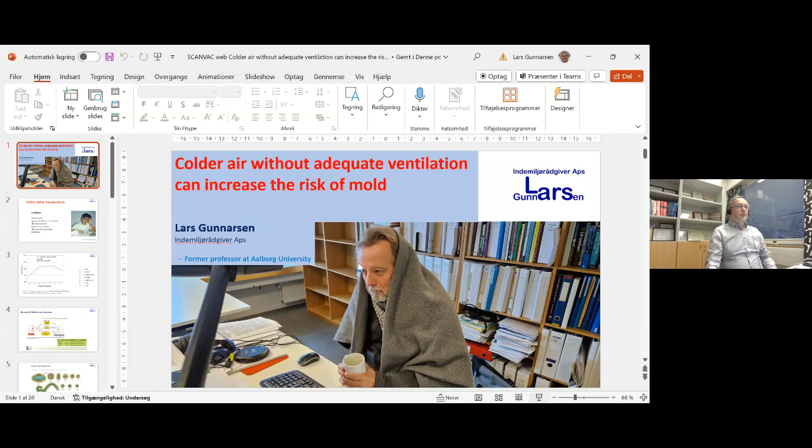This topic rose up after discussion with Nordic colleagues, that it's important to share experience in energy saving when we have challenges for energy, and especially energy power, in some countries. We have huge demand to save energy in wintertime, and that may cause challenges for indoor climate conditions, and maybe also challenges to keep the needed energy targets and cost levels we are talking about. So we are now focusing on this topic and collecting key talks from different Nordic countries, and what kind of experience we have here.

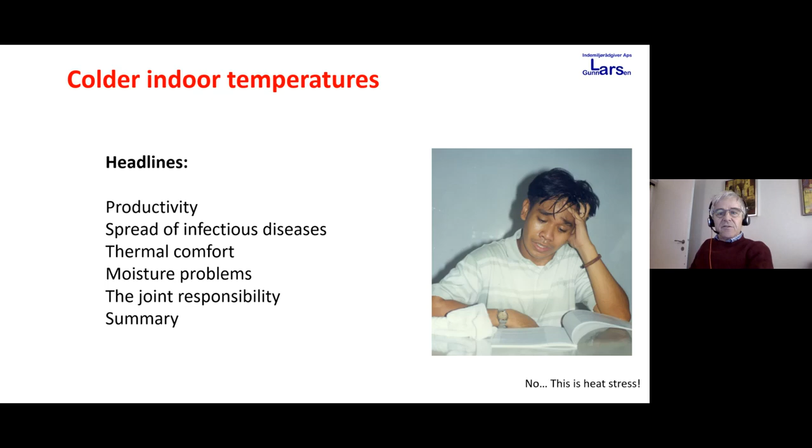So, well-known old findings: when we have poor thermal sensations, then our productivity drops. And of course this is very serious when we think about school environments, that learning is not so efficient. And I'm sure our employers are also quite focused on this.

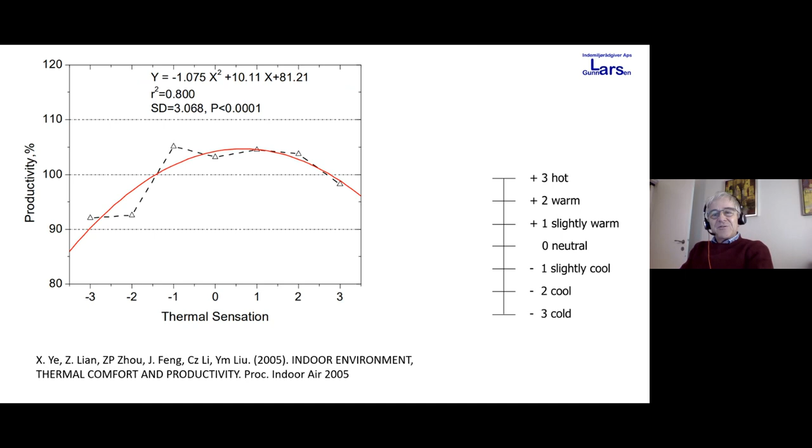It's quite important to know that when we earn a salary and we are not in thermal comfort, then we may not be worth our salary. It's a joint obligation, of course, between employer and employee, that we should not suffer from feeling cold or feeling warm. And it's also quite important to recognize that thermal sensation is a response of temperature, clothing and activity. So it's not impossible to feel comfortable even in quite cold environments.

Spread of infectious diseases: here we have something with the size of the droplets that are spreading these. If we are in warm and dry environments, the droplets we exhale and cough out will very soon become little particles. In more humid environments, the evaporation of water around the particles will be slow, and some will keep being droplets that can traject directly to our surrounding occupants or drop to floors and desks.

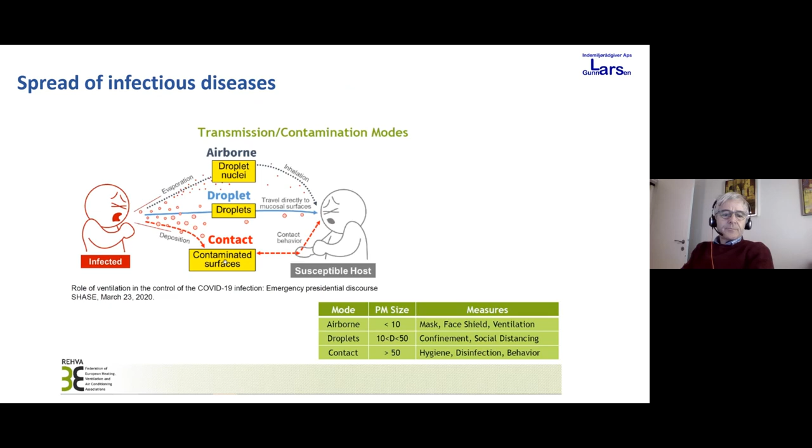It's important in this aspect to recognize that the viruses that might be infectious are so small that they can stay airborne for a long time. When we are in the virus range, say 0.001 or 0.01, then displacement due to diffusion is important. And when we are in the droplet range, then displacement due to sedimentation is the important transport mode for these particles.

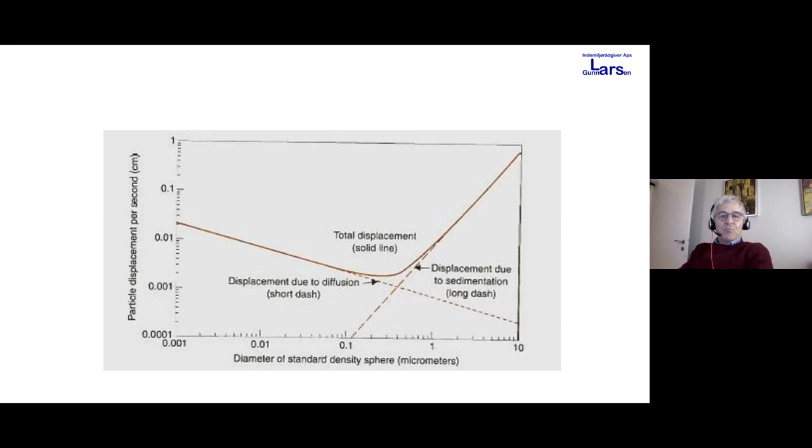Another old finding, of course, is that when you are exposed to something that makes you feel cold, then you are far more vulnerable to infections. So I find this a very strong experiment.

For 20 minutes, half the test persons were asked to take off shoes and socks and sit with their feet in a bucket with cold water at 10 degrees Celsius. The other half, the control group, sat with their shoes and socks off but their feet in empty buckets, also for 20 minutes. Then 4 to 5 days later, the difference between subjects reporting to have a common cold was significant and quite marked. 13 out of the 90 who had been sitting there with cold feet reported having a common cold, and only 5 among the control group.

When it comes to this impact, during last year the energy crisis and the rise of gas prices for domestic heating was very high. Then also in offices, public offices or governmental offices, we were recommended to have only 19 degrees.

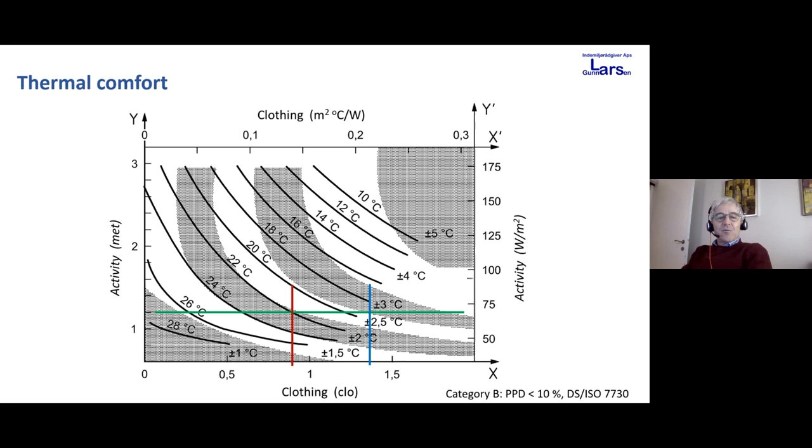This green line is trying to intercept 1.2 met, the traditional way of thinking about the activity we have when we do office work, and the red line is intercepting 22 degrees, my approximation of what I used to have in my office before that crisis last winter. Something like 0.9 clo value and something like 1.4 clo value to be in comfort.

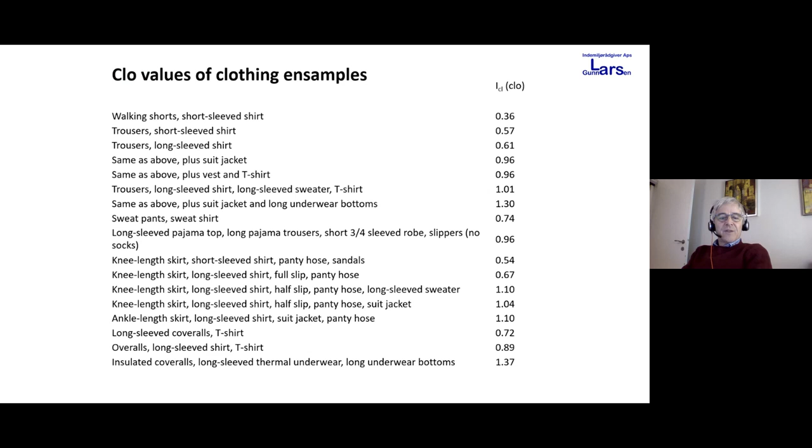When we look at these clo values, the closest I can get to the high is trousers, long sleeve shirts, long sleeve sweater, t-shirt, suit jacket, and long underwear bottoms. So that's a lot of clothes to have on.

This is what I used to go to work with, and last winter I used a lot more clothing, and of course the unusual thing for me was these long underwears under my trousers.

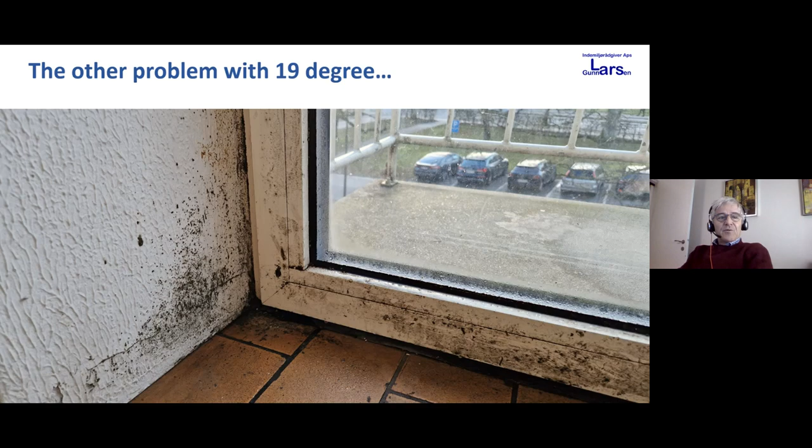The other problem with 19 degrees, which is of course the primary focus of this presentation, is that the colder air gets, the less actual water the air can contain. It's obvious, I guess, to most of us that the diffusion of water molecules is not in relation to relative humidity, but to absolute water content.

So if we look at the absolute water content at something I have estimated to be an average cold day in Denmark - I'm sure in other Nordic countries an average cold day will be a lot colder than 10 degrees, but my approximation here is made for 10 degrees, and we all have days with 10 degrees outside - and then I have the 19 degrees and the 22 degrees.

What I'm thinking here as a risk of mold is 70% relative humidity, and we have 11.5 grams per kilo in the warm environment, 9.5 at 19 degrees, and 7.5 grams per kilo in the outside air on a rainy day at 10 degrees Celsius.

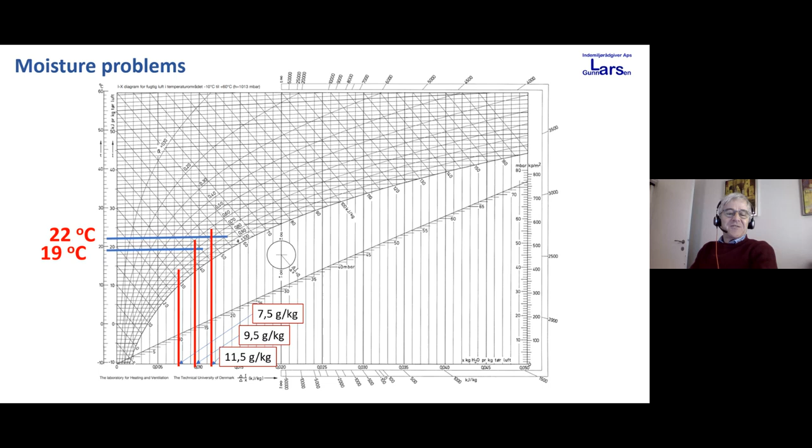So here come the primitive calculations I've done: how much more water can indoor air contain at 22 degrees than at 19 degrees, at the same relative humidity of 70%? It doesn't seem really scary, 21%.

But still remarkable. Where it really becomes serious, and when we can recognize that lowering indoor air temperature from what we were used to down to 19 degrees matters, is the answer to how much higher an air change rate is required at 19 degrees than at 22 degrees to have the same assurance of not exceeding 70%. My simple calculations say it's a factor of 2.

This was something many Danes failed to realize when there was this brief period of very high energy prices last winter, and many of us experienced mold growth during that winter. To communicate it simply: when you have 19 degrees indoors, you need to air out your office or home twice as much as you used to.

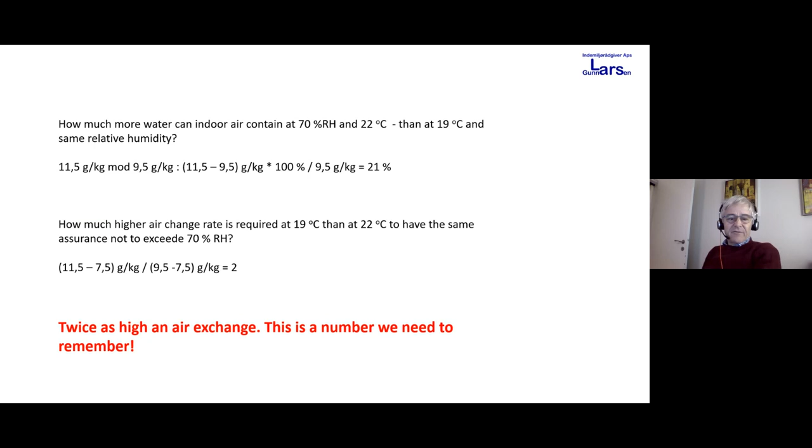My primitive calculations before can also be supported by BSIM, a computer program from my old employer. So if we think about a small apartment, not very unusual, 6 times 8 meters, 48 square meters - it is small - with a ceiling height of 2.4 meters.

I guess you can read the rest: 2 persons living there with normal moisture production, nice windows exposed to sunshine from the south, and these people air out with a lot of air changes when temperatures exceed 25 degrees. It's a modern house with a nice U value of 0.3 watts per square meter Kelvin.

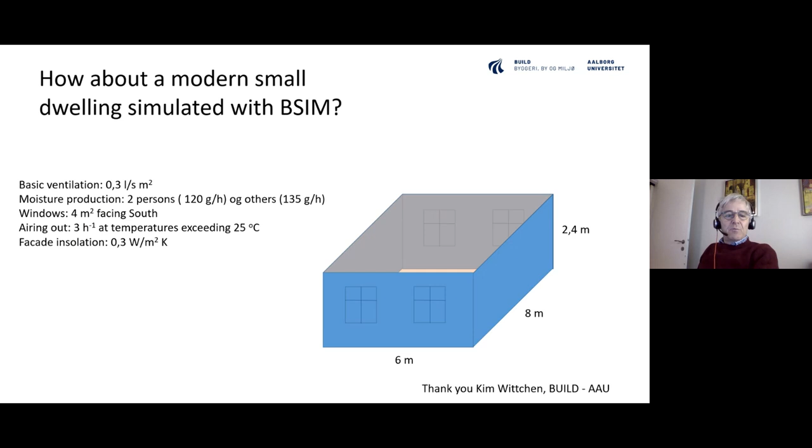And of course, this is an apartment we are envisioning with no cold surfaces anywhere. So if we have some cold surfaces around the windows or somewhere else, then those places could have mold growth earlier on. So this is something I see as a big problem if we go to 19 degrees normally, and if we don't have a lot of excess airing out in the cold periods.

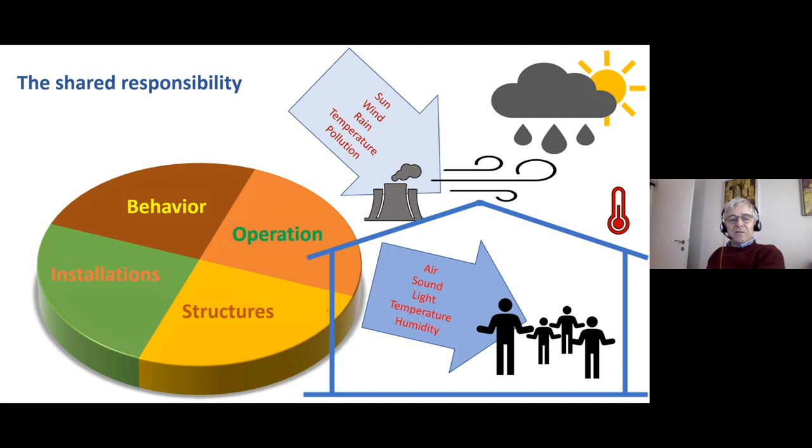So this is the end. My summary: we perform and learn less when we are not in thermal comfort. So take on clothes if you are cold.

And of course, my experience with these 19 degrees, as when we are a little bit below 19, then we also need gloves and maybe a hat on. So I think I'm paid by my employer to press keyboards and things like that, and I cannot work with gloves. So 19 is somewhat a limit for what normal clothing can do during office work.

Spread of infection, I think it's more or less established that we infect each other more in dry air. And it's definitely very established that we are more susceptible to infection when we are cold. So one thing is the effect of dry air on these droplets, and the other thing is our body's reaction to being cold, making our mucous membranes more vulnerable.

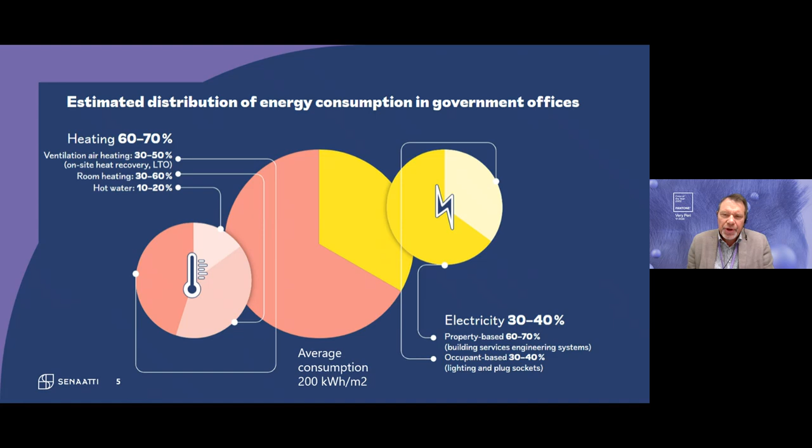If we look at normal energy consumption in government offices in Finland, average consumption is about 200 kilowatt hours per square meter, and most of it is heating, and also ventilation, normally the biggest part. Then we have the electricity side, where property-based use is most of it, and occupant-based is about 30%, meaning lighting and plug socket use.

We started this energy saving program more than a year ago, and we set our goals: first, to reduce energy consumption by 50 to 75 gigawatt hours, which is about 5% for one year of use. We calculated it's possible to save as much as 10 million euros in savings, and we also started a program for more demand side management and the possibility to reduce electricity consumption or shift it to another time.

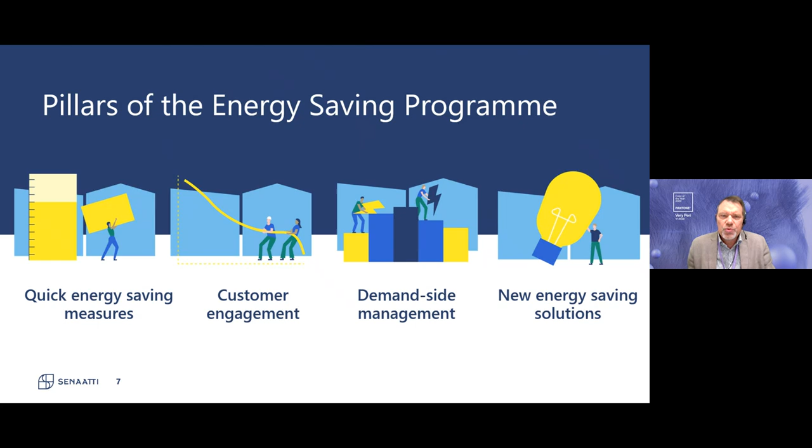The results: one year into this program, energy savings are about 73 gigawatt hours, almost 5% of normal year consumption. That translates to cost savings of about 6 million euros, not 10, because the energy price has not been as high as we expected. These measures have been completed in more than 1,000 buildings.

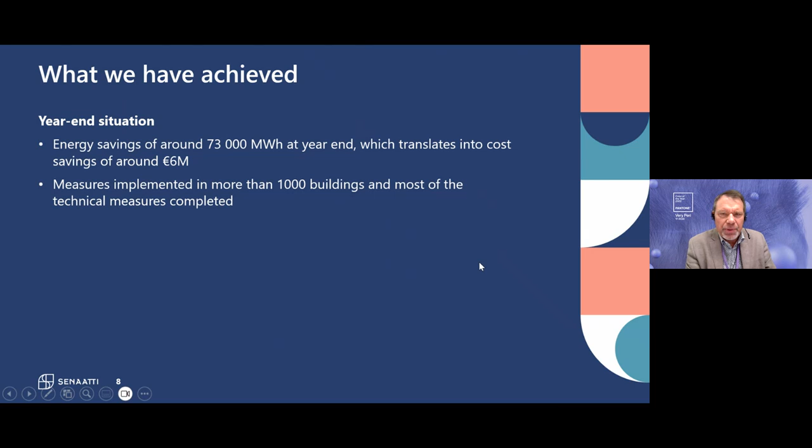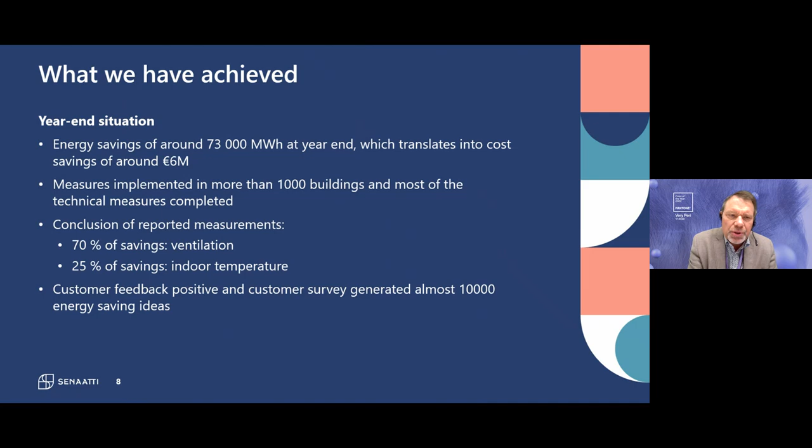We've also drawn conclusions from all the reported measurements - not a big surprise - that 70% of savings are connected to ventilation systems and 25% to indoor temperature. But most important, customer feedback has been positive, and one sign of that is the customer survey generated almost 10,000 energy saving ideas from the customer side. They are very interested in this program.

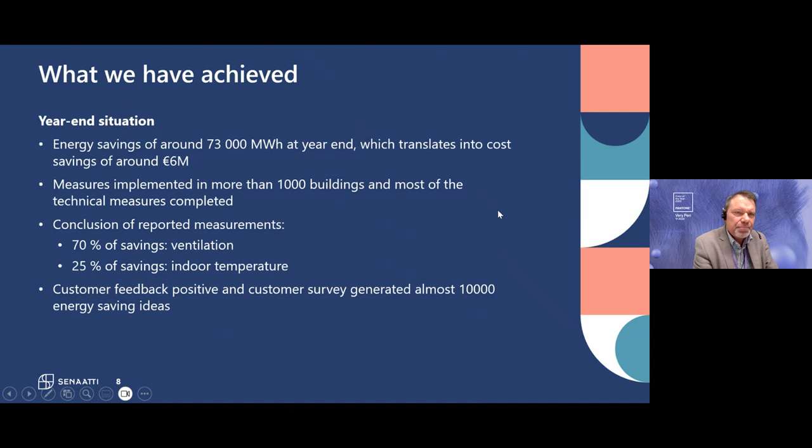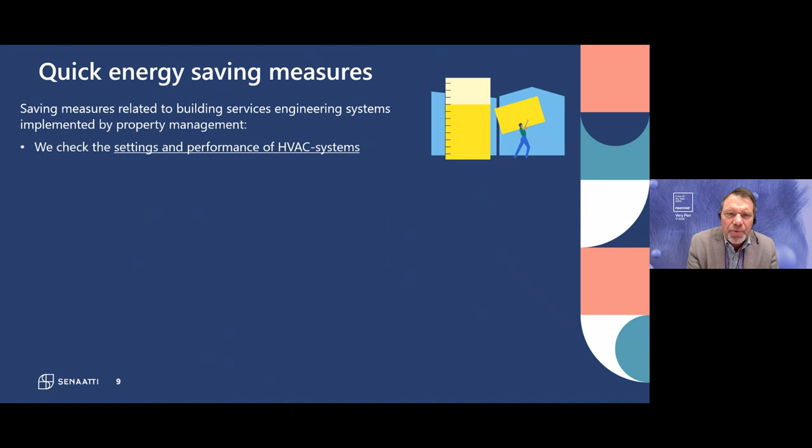These quick energy saving measures include, once again, checking the settings and performance of HVAC systems. We decided to lower the temperature in offices to the level of 20.5 degrees Celsius, not under that.

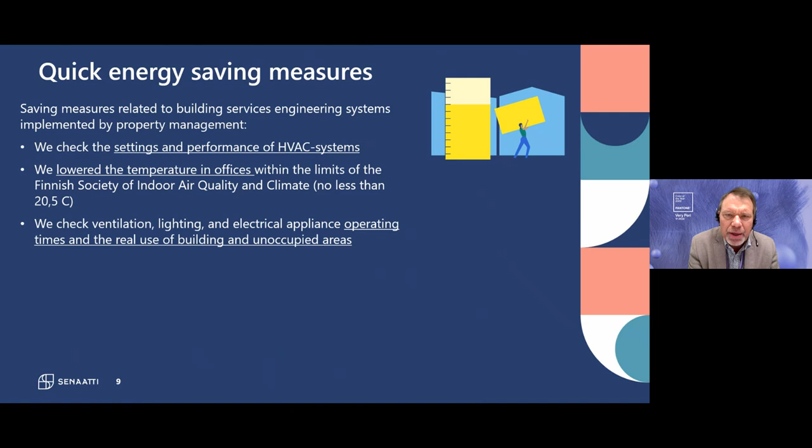And of course, the operating times of all systems, but in this case, also in Finland, connecting it to the real use of the building. We have a lot of unoccupied areas, and in those areas it was possible to do more savings.

Then we started using the air conditioning units at a lower stage during very cold outside temperatures. This is not only energy saving, but a very good way to cut the power peak of heating and electricity as well.

And of course, we make sure that this doesn't compromise safety or indoor air quality. That means that if there are cases with information about issues, then we go back to the normal way of using the systems.

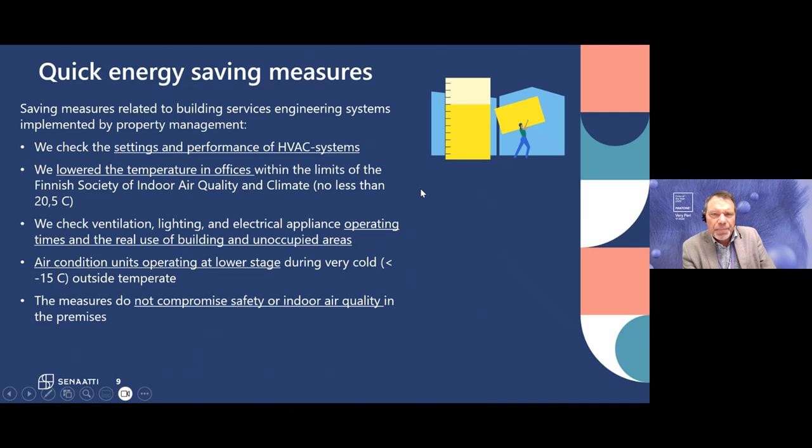Customer engagement was, of course, very important to make sure everybody knows what we are doing, why we are doing it, and when we are doing it. We also collected customers' own energy saving ideas - as I said, we got almost 10,000.

We made a satisfaction survey, and it was also possible to send feedback from our open website. We have already in many buildings the possibility to send feedback from those buildings with QR codes, and it goes straight to the property management system.

But what was most important is that during this year there has not been a big difference in customers' feedback regarding indoor climate.

Internal communication also took care that there were many people and many teams involved with this program. We got info to the property managers, and we collected all this information on our homepage on the intranet.

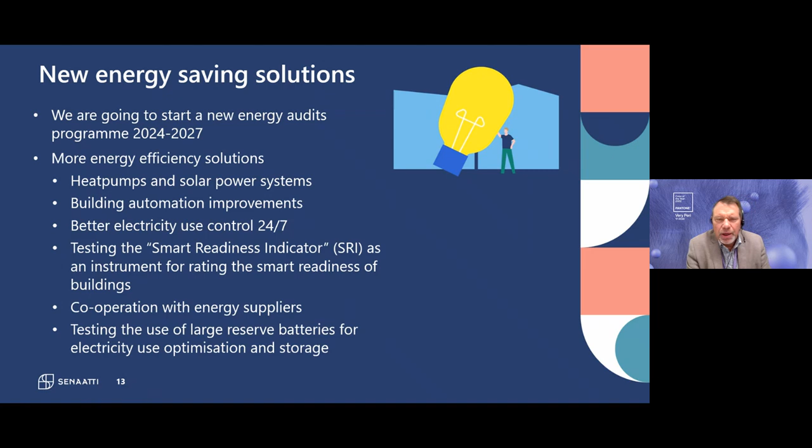Most of our big buildings are in the district heating area, but we have to have more cooperation also with energy suppliers. Next year we are also testing the use of large reserve batteries for electricity use optimization and for storage.

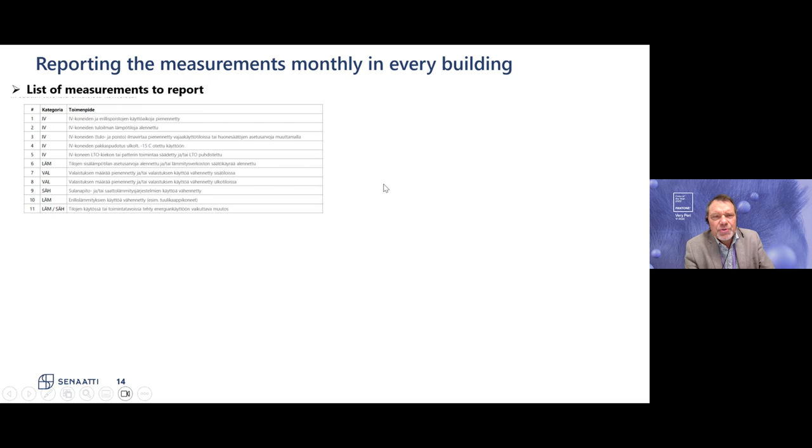When we started this program, I wanted there to be a reporting system from the beginning, so we could have information about the measurements monthly and in every building. So in our system, we made this kind of list of measurements. There are ventilation, heating, lighting, and so on, this type of measurements to report, then monthly reporting.

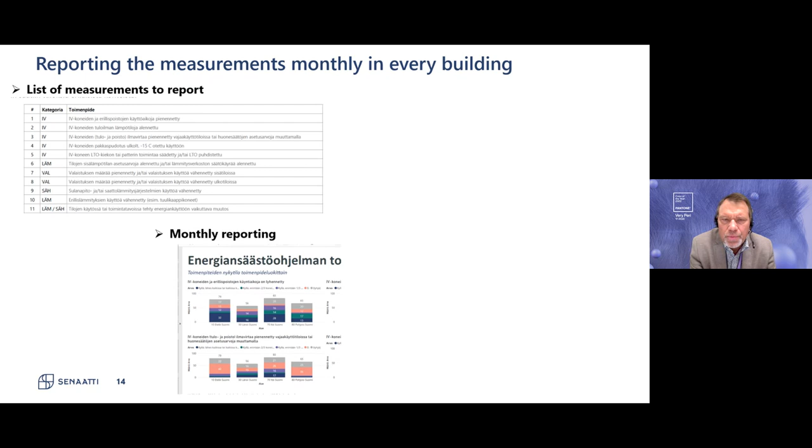The colors in this picture show information about whether this measurement is for a large part or part of the building. So in this monthly reporting, we could calculate and estimate the savings achieved, and we started this from the beginning, so we were all the time aware how the savings were going. After 2 months we got the savings reporting, and it was good enough, so we were having the kind of savings that we expected.

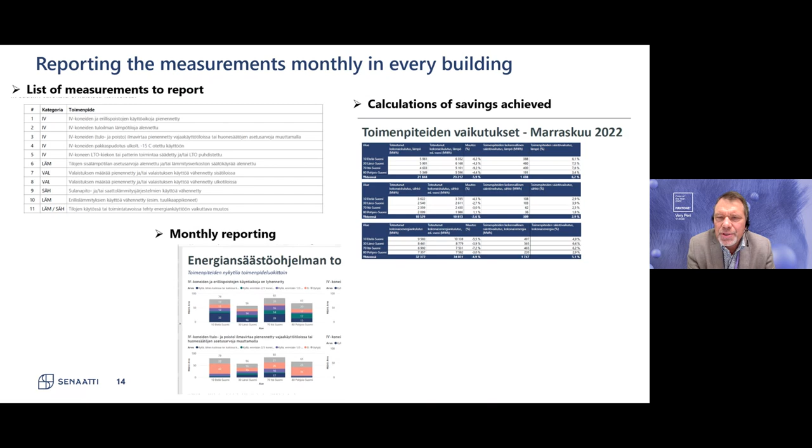Okay, what did we learn? For me, first of all, I was in a way quite surprised that there were still many ways to make the energy use more efficient. These 5% savings are much more than we normally achieve. We are at that kind of 1 to 2% level over the past few years.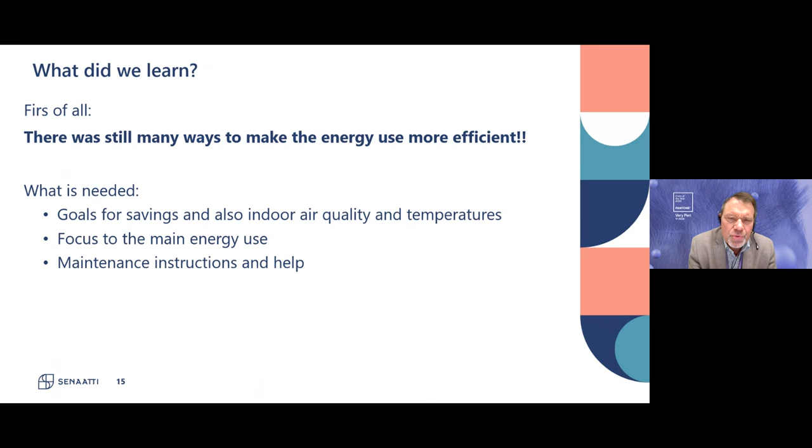Looking at this program, we can say we need, of course, goals for savings, but also goals for indoor air quality and temperatures. Then we have to focus on the main energy use, and of course the maintenance instructions, how we do it, and also online help with these instructions. Information, very much information, and cooperation with customers. And also very important from the beginning is to have continuing reporting of actions and savings, so we can make the right moves if needed for this program.

And of course, very much work at the buildings. This is not an easy way to do it, but in this way we can succeed.

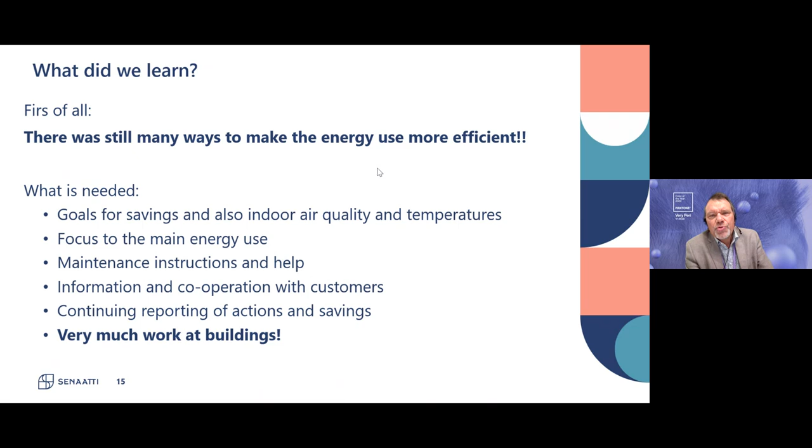We are going to continue this program. We are not going back to what was before it, but of course we are not expecting so much savings anymore. Next year we are expecting about 1 to 2% savings, and of course new, more energy efficient systems and solutions are coming, and they will help us also with these energy audit programs.

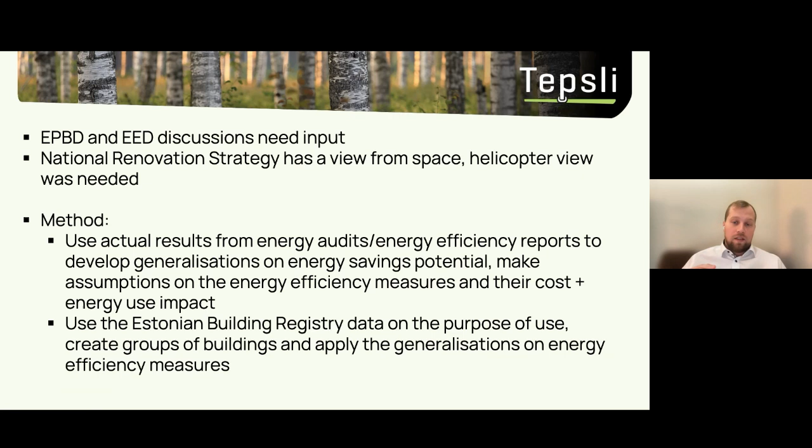So if you look at it, imagine two sheets of paper. On one sheet, you have the data on the purpose of use of buildings from the Estonian building registry, and some data on those buildings. The other sheet is how you can make different building segments more energy efficient. So we tried to align those two layers and see what the outcome would be.

I will just say that for industrial buildings, we only took into account the building itself, not the industrial processes within those buildings. And with transportation, that includes all transport-related buildings, so to speak, like bus terminals, train stations, whatever have you.

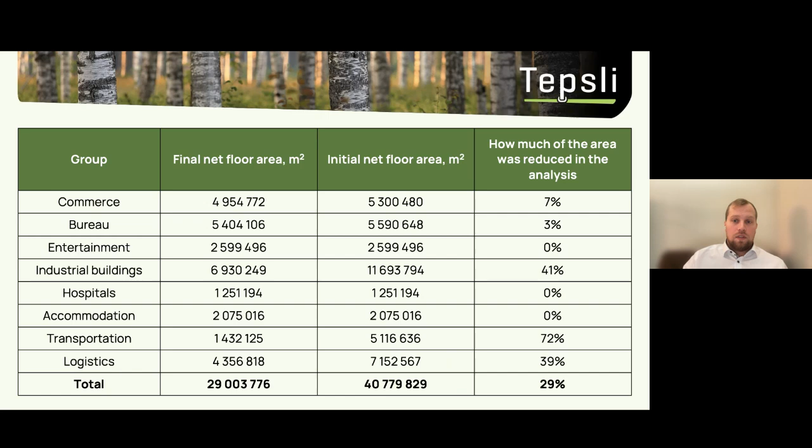Then, maybe as I'm here among engineers, one of the most controversial assumptions or findings was that we started off by creating tailor-made renovation packages for each of the building groups. But as we proceeded with our analysis, we saw that we had similar sites that we had analyzed, together with our competitor, or separately, different buildings. We had lists of different energy savings measures, but the outcome of those measures among a single group was very similar.

Meaning, let's take for example an office building. The actual energy savings measures you do in an office building might vary - you might replace automation, replace controllers, replace pumps, do something with the cooling units. The actions might be different, but the savings you are able to achieve with those improvements in technical systems in an office building were similar.

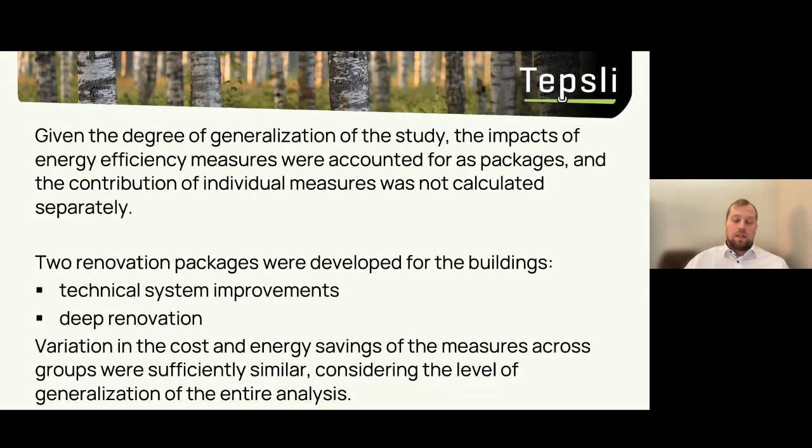So in the end, since this was a quick project with quite little resources, we developed only 2 renovation packages for all the groups: technical system improvements and deep renovation improvements. I will show and explain these concepts afterwards, but we didn't use a tailor-made list of savings measures per building group.

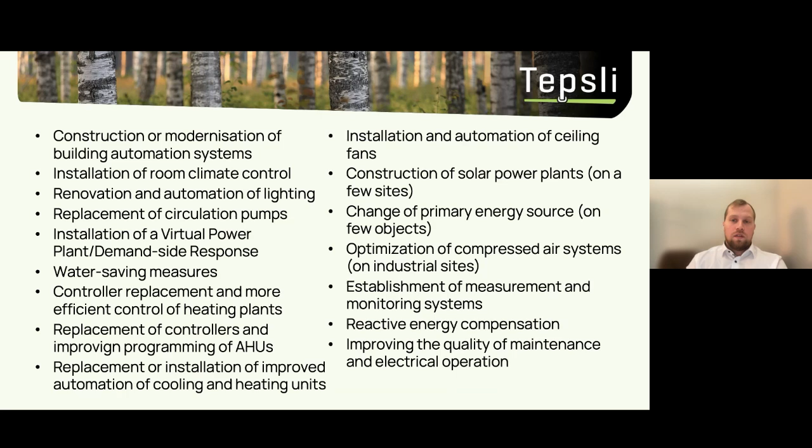Change of primary energy source was quite seldom an energy efficiency measure, and the construction of solar power plants was suggested only on a few sites. I will show you later why.

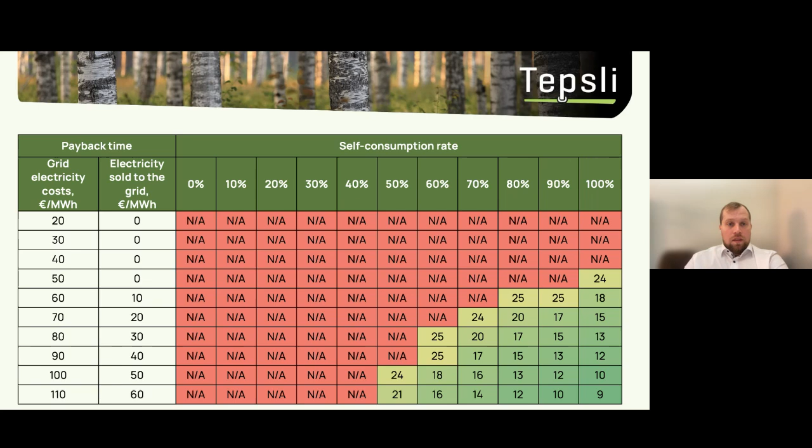All right, so a couple of conclusions again. Applying this method, we were able to assess what the energy savings potential was in commercial real estate in Estonia. We saw that it is possible to invest 700 million euros in 2023 prices in tapping into that energy savings potential, and it would be a good investment given the payback time of 5 years or less, and we would be able to save 140 million euros per year in the end users' pockets by implementing these measures.

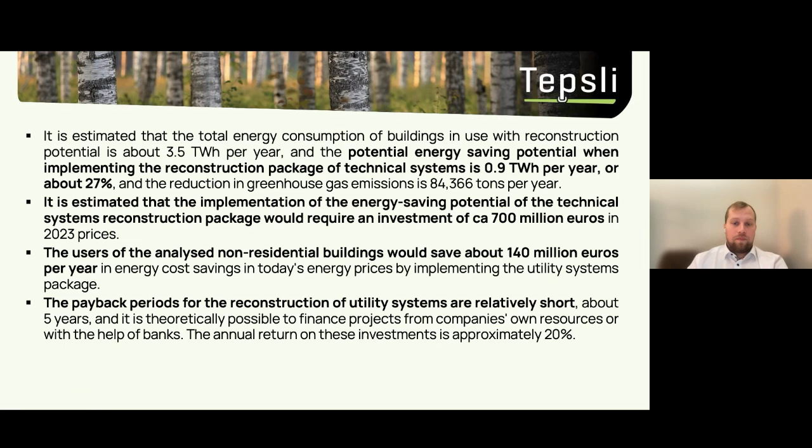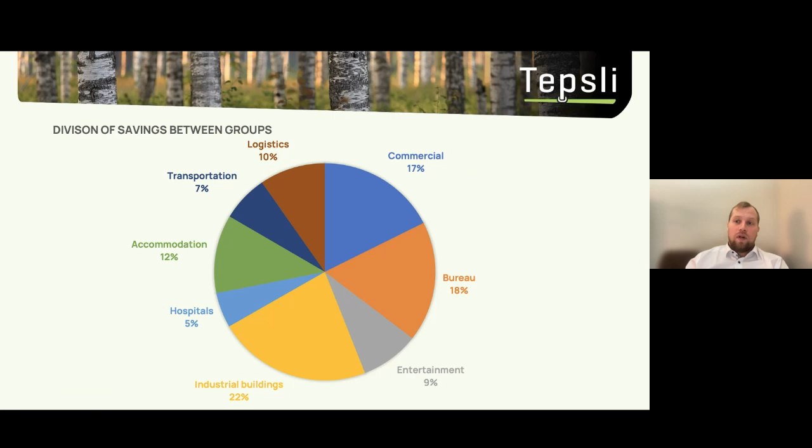The division of savings between groups is given here. You can see that most of it is industrial buildings, commerce, and offices. Of course, in Estonia, we have to take into account that for offices, for example, two-thirds of them are situated in and around Tallinn, and a lot in Tartu. So when we are also having now ongoing discussions on how to create the incentives to make these investments happen, we have to take into account the fact that there are regional differences among these building groups that we should take care of.

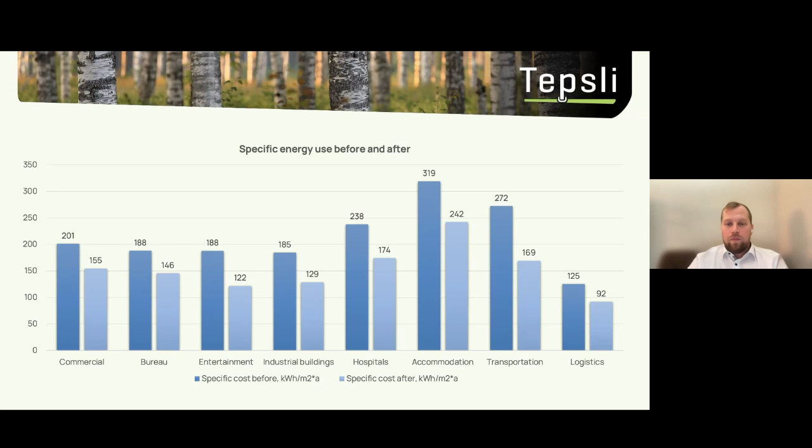And of course, here you can see as well stuff that probably we don't need to go into too much detail on, that logistics buildings have in general lower energy use, and accommodation and hospitals have larger energy use.

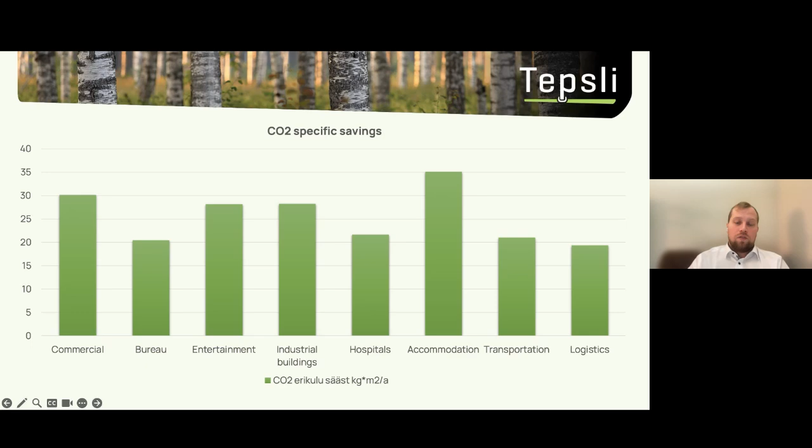We also tried to say something about CO2 or greenhouse gases - this greenhouse gas equivalent. The savings here are based on specific audits. So the likelihood of using fossil fuels versus renewable energies, being connected to a district heating network or not - this is all somehow already incorporated into the building group as well.

Again, some numbers - I'm sure they create a lot of discussion, but that's very normal if you have a study with this type of generalization. Investment costs, as I said, are about 40 euros per square meter. The price of greenhouse gas savings, again, is 90 to 100 euros per ton, which is not that expensive considering today's prices on the market, I would say.

Something that I didn't go into detail at all was the deep renovation of buildings. There you have one conclusion here, that they have a very long payback period, which usually starts from about 50 years. And something to be taken into account is that quite often these projects are not done for energy saving purposes alone. So these renovations cost in Estonia about 900 to 1,200 euros per square meter, and the component of cost of measures that have an energy savings impact is very low. So these measures are usually connected to everything else as well, not only energy savings.

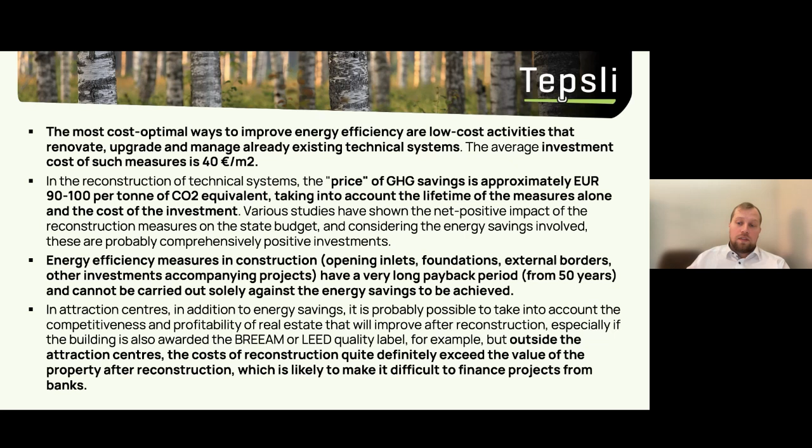And the final point here: as I said, these deep renovations might be attractive in Tallinn or Tartu or in bigger centers, but it's quite sure that the deep renovations exceed the value of the property after reconstruction in the regions where the real estate market is not so competitive, and it's very difficult to finance these types of projects from the banks.

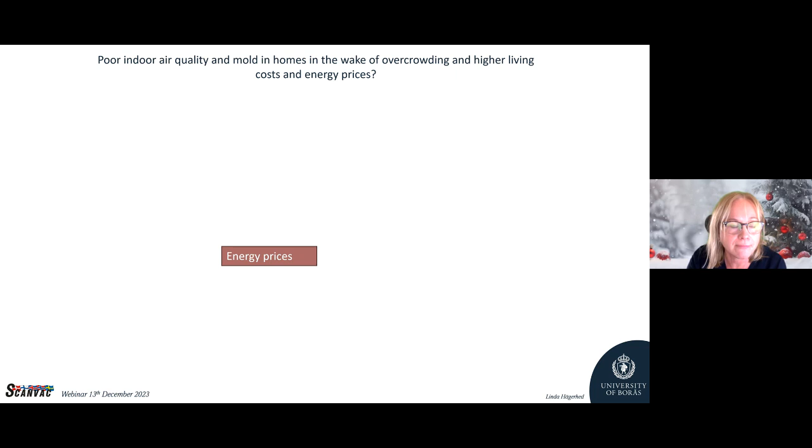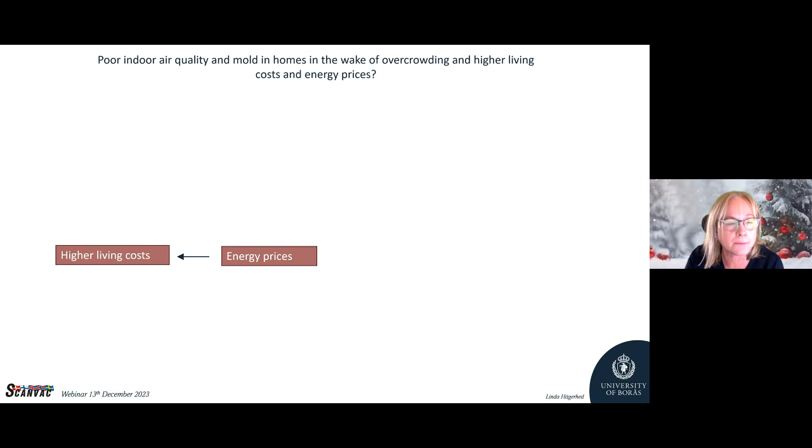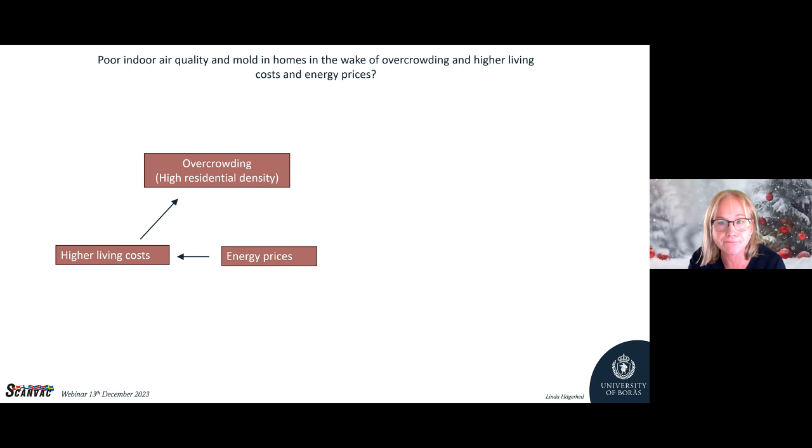And in some families it also leads to overcrowding. It could also be that you cannot move to a bigger flat, or you can't move from home when you are a young adult and have to stay with your family. And with overcrowding, it also comes poor indoor air quality and mold. We will check at some examples later.

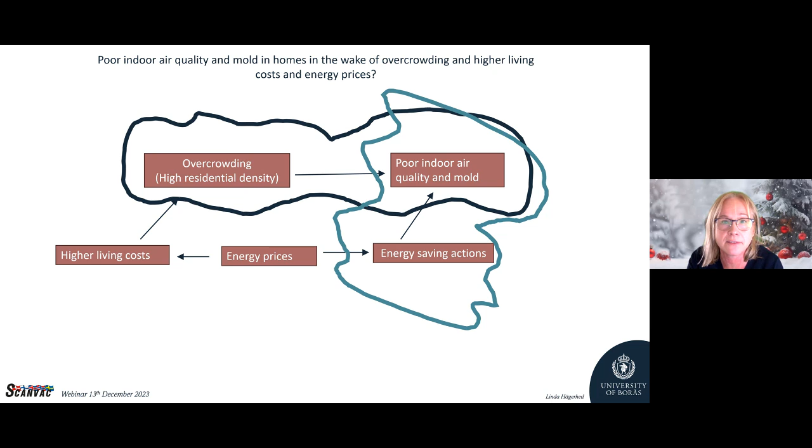So energy prices will also give energy saving actions. It could also affect indoor air quality and mold risks in our homes. So first we will focus on this area of overcrowding and indoor air quality and dampness, and then we have some examples of energy saving actions and poor indoor air quality.

So we know that poor indoor air quality and mold affects our health and cognitive performance and also sleeping performance, and a lot of more.

And that changed the overcrowding from about 50% to, in the 90s, 2.5%. And after the Million program was finished, it was about 7% overcrowding. But in the 90s, it was the best numbers at 2.5%, but this trend is unfortunately going higher, and nowadays we are up to 6 and 7% of overcrowding persons in our buildings.

This picture shows those numbers for our Nordic countries. It's only up to 2019, but anyway, we can see that the Swedish one, the blue, is a bit higher up than the other Nordic countries.

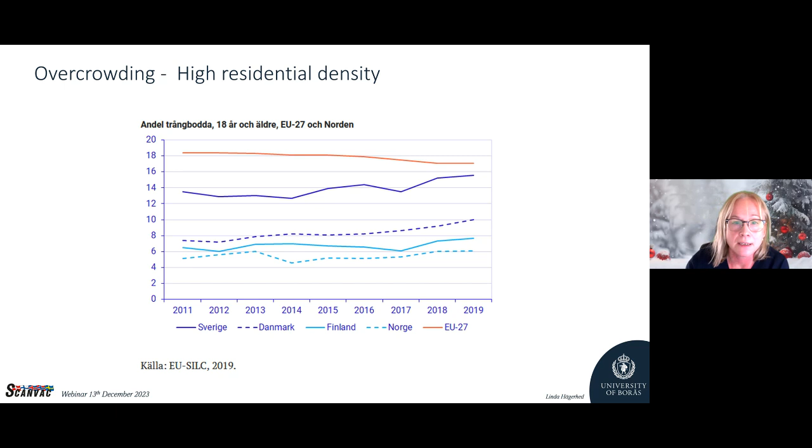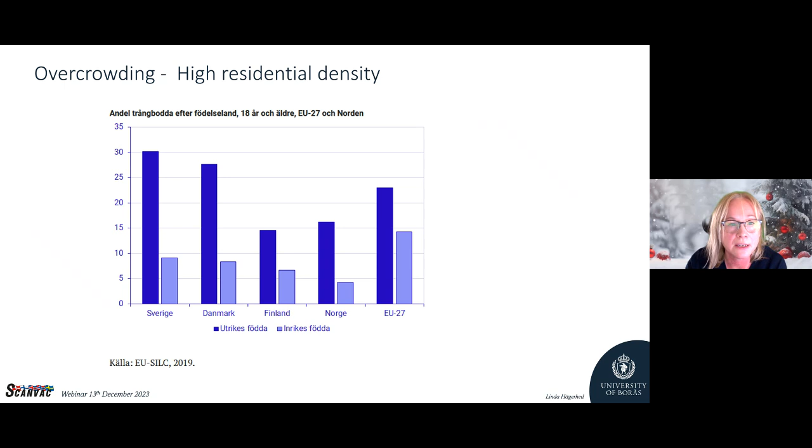It's one of the matters that we have a lot of foreigners that we helped during the crisis. And if we look at another statistic, we can see also that the number of foreigners is also a matter of fact in all the countries affected by overcrowding. And the overcrowding is also a measure of income.

First, we can see that most of the young adults live in overcrowded apartments. And if we look at the figure on income, we can see that the poor quintile has also the higher amount of high residential density, or overcrowding, while the rich ones, of course, have more square meters per person.

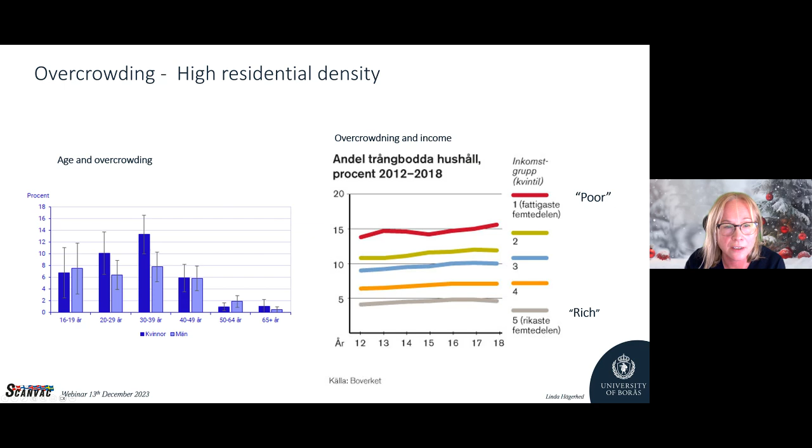So what is the impact? Of course, there is wear and tear, damage to surfaces, ventilation, moisture and mold risk, but also noise impact within and between apartments. An important risk is also fire risk and how to evacuate persons in case of fire. Sanitary issues, bacteria and viruses, and also the well-being, health and social life of families and children, who have a hard time doing proper schoolwork, hang outdoors more, and it has also been a matter of shame not to invite friends over. So there are a lot of different shortcomings with overcrowding.

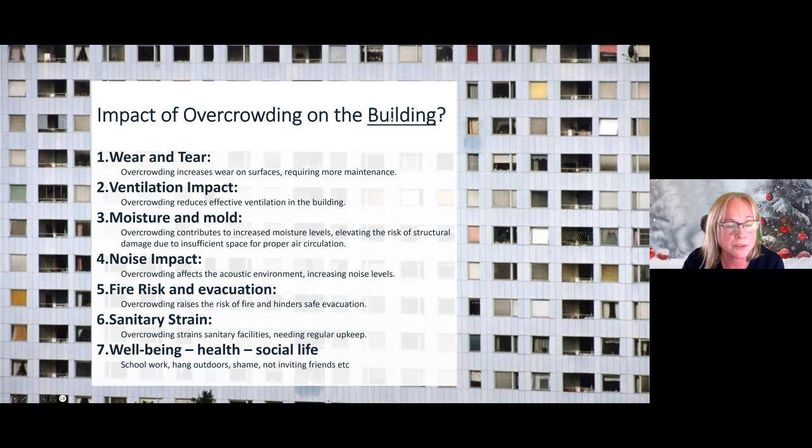But in the matter of dampness, our behaviors and habits also increase the moisture content in the air. If there are more people, there is also more showering, cooking, laundry and dry tumbling, and if you have these equipments in the apartment nowadays. And of course, our breath and dermal diffusion of moisture increase the moisture indoors.

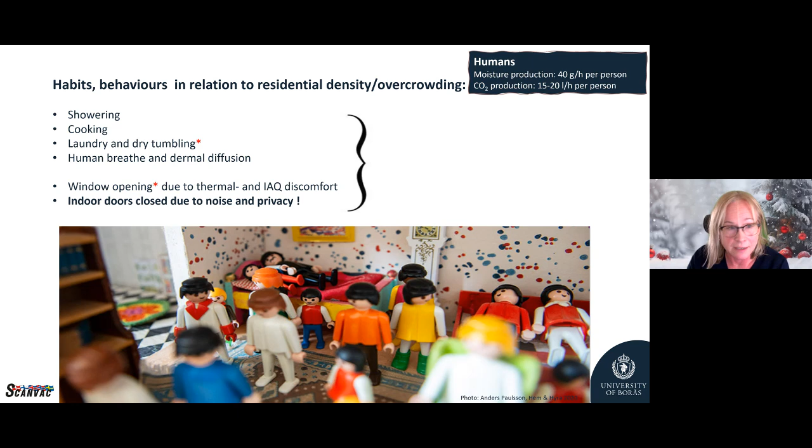If you have an apartment with low indoor air quality due to these facts or others, you also want to open the windows due to thermal and indoor air quality discomfort. And that's of course because it's okay when you don't have to pay for the radiators to improve their temperature. So also we can't forget that if you have many people in the apartment, you also close the doors between rooms.

I had a student who made this as a student project in one of my courses. There were many people in her family in a flat, and she shared the room with one sister. When she slept with her, usually they had the windows open to get some fresh air, and she tried to make measurements of outdoor air and indoor air, and we got the moisture supply. So the moisture supply was about 7 under normal circumstances when she opened the window and closed the door. And it was a bit more when she closed the window as well.

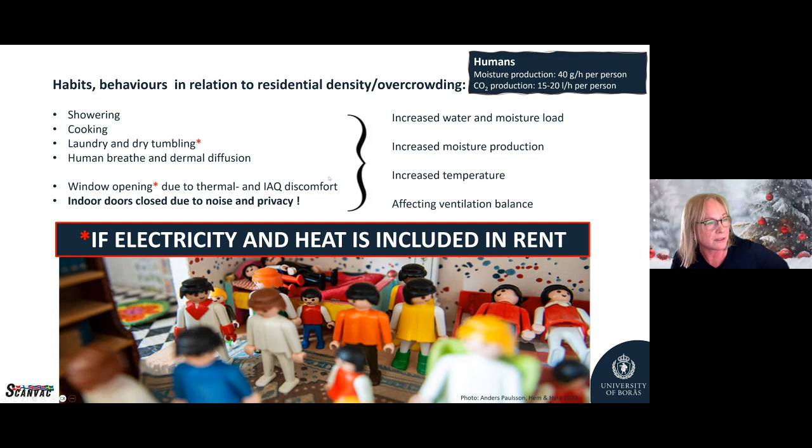But what we know is that closing the door could also be a big measure, whether the exhaust ventilation works or not. I will give you a short picture of that later. And it's not all about how people live in there or feel the indoor air quality, it's also a matter of dampness on the structure.

This is two pictures of bathrooms built in the 50s and 60s. You can see that they have bath tubs and not showers. So if more than one person showers every Saturday, it will of course get more moisture load in this bathroom, and the surfaces are not built for showering, they're built for taking a bath. They also quite often have windows, so there is a risk of mold problems here.

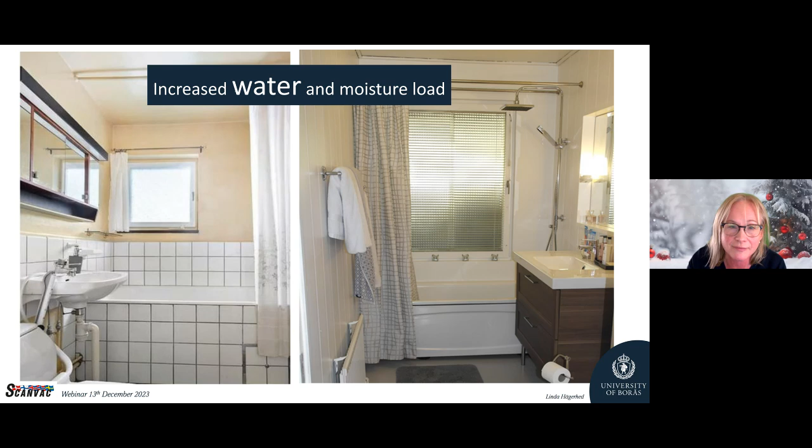And also, as Lars told us, an increased production of moisture can also lead to condensation and mold on surfaces. Mold on surfaces is not very common in Swedish buildings, but nowadays in those overcrowded apartments it's actually a problem.

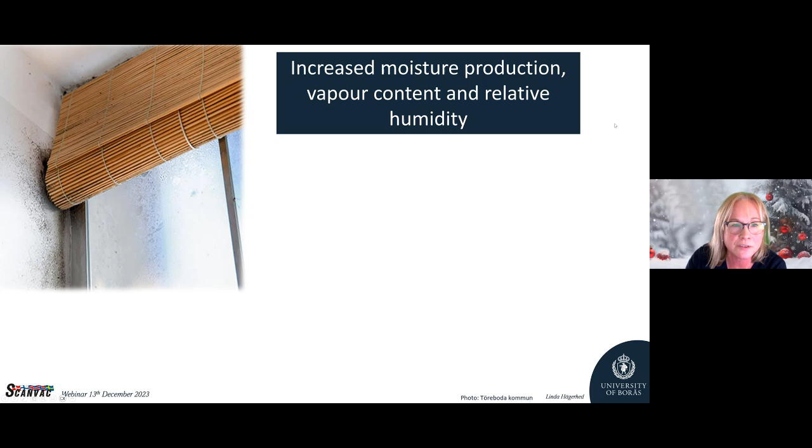Another issue is also mite allergy. When you have more than about 40 to 60% relative humidity, there's a huge risk of having mites in your bed, and you get allergies from that. You can't sleep, your nose gets stuck, and so on.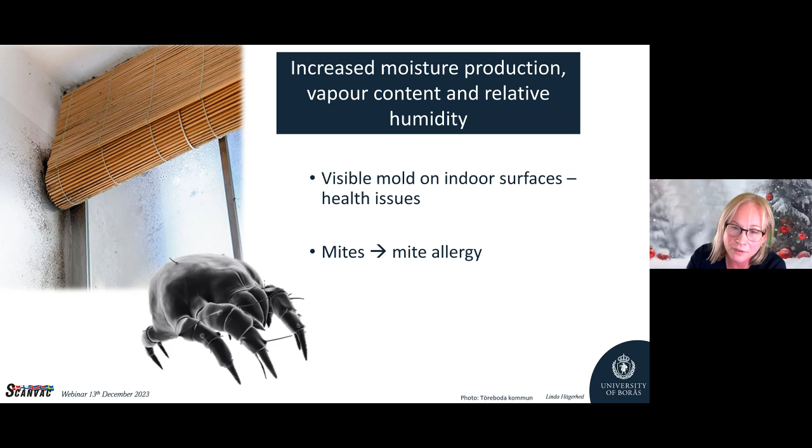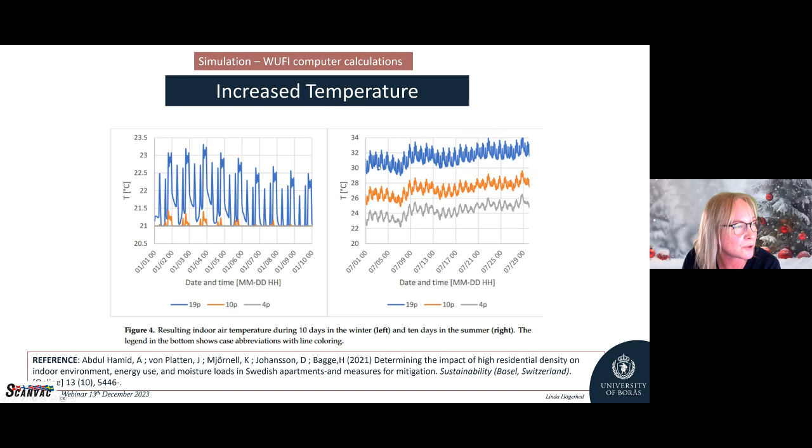I have not seen so many measures on overcrowded apartments, but a study from Hamid and Mjörnell and persons from Lund University, they made a WUFI computer calculation. This shows increased temperature, for wintertime and summertime. We can see that if there were 19 persons, quite many in one apartment in this example, the temperature is much higher, both in winter and summer. If there are more persons in those apartments, it's not hard to guess, but in summer days we have more than 30 degrees in their calculations.

And of course, also the carbon dioxide indoors in those overcrowded apartments is increasing compared to smaller families. We don't die from 3,500 ppm of carbon dioxide, but it's more than double what it should be if we go by the public health authorities' minimum levels of 4 liters per second per person, which gives about 1,500.

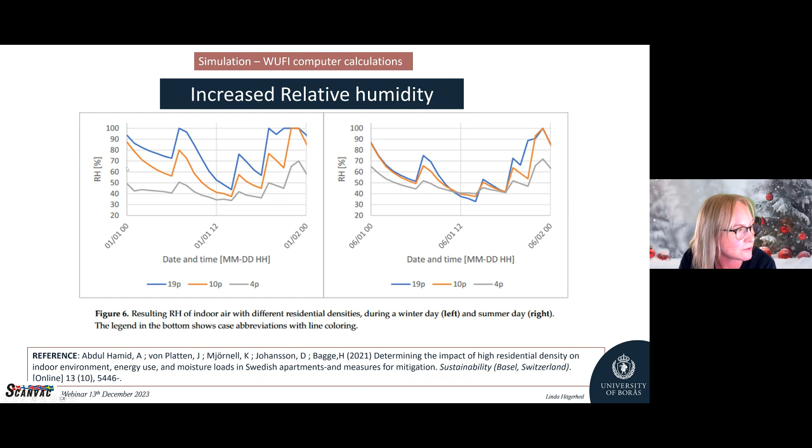And this also shows the increase of relative humidity. In the most overcrowded apartments, there will be almost 100% according to their calculation, but most of them are also over 60%, and you can see also the mites risk and the risk of mold on indoor surfaces also increases. So this is the relative humidity on gypsum board, wintertime and summertime, and we can see the time for relative humidity over 80% is for a long period. So this could be a big problem.

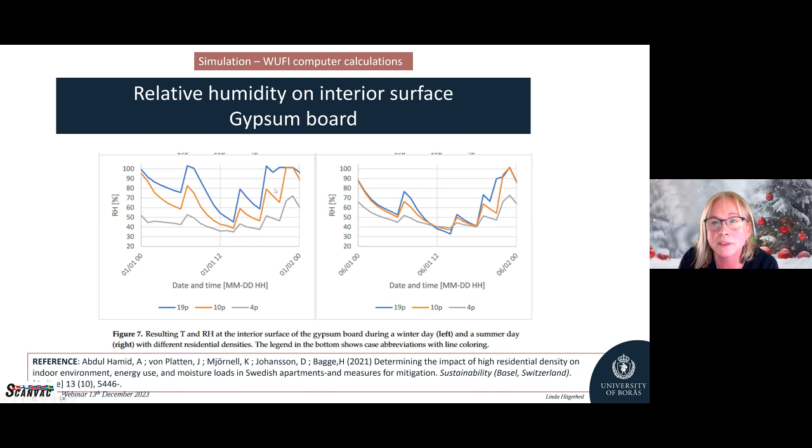So how should we manage overcrowding? We need to build more houses, and the Swedish Authority, National Board of Housing, has calculated that we need more than 67,000 more apartments or residences in the next 7 years. And a huge amount of buildings also have to be renovated, multi-family houses.

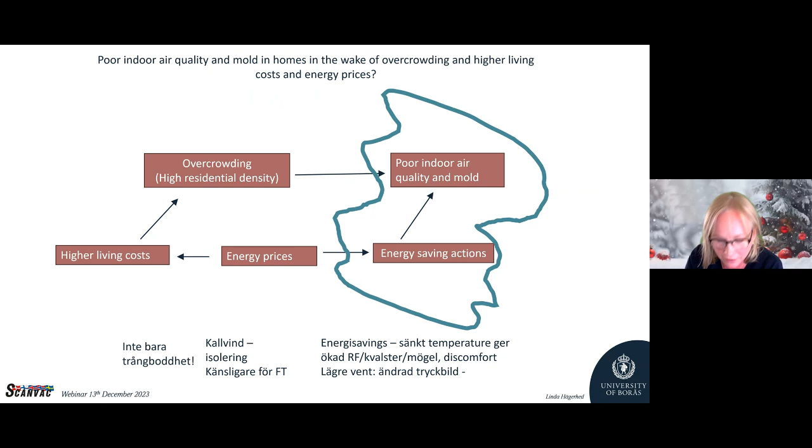So in the wake of poor indoor air quality and energy saving actions, there are a lot of things to say. A Swedish study showed a few months ago, they made a study on what Swedish persons know about energy and electricity saving.

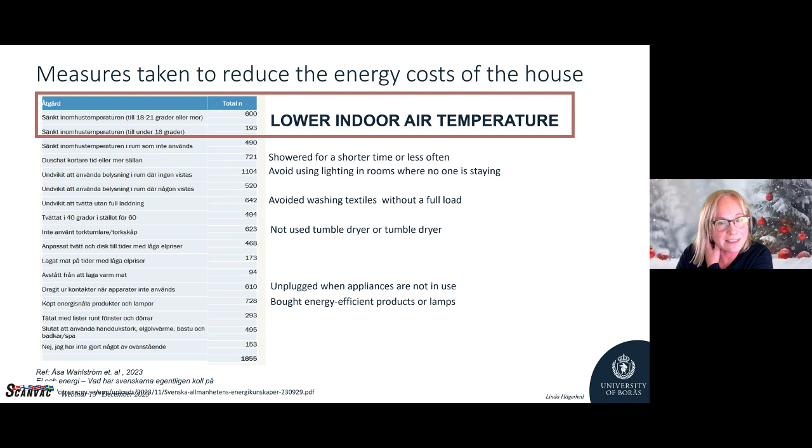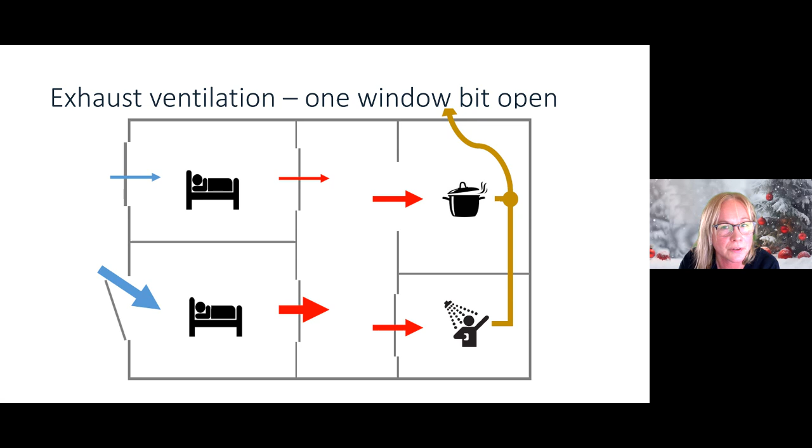So what happens if you close the door? The exhaust ventilation from the windows in that room will also decrease due to pressure differences. So if you open doors, open windows, closing doors in an apartment with exhaust ventilation, it affects the ventilation efficiency.

And this is also the matter of overcrowding. If you want to have some peace and calm in your bedroom, if you have a lot of small sisters and brothers when you want to sleep.

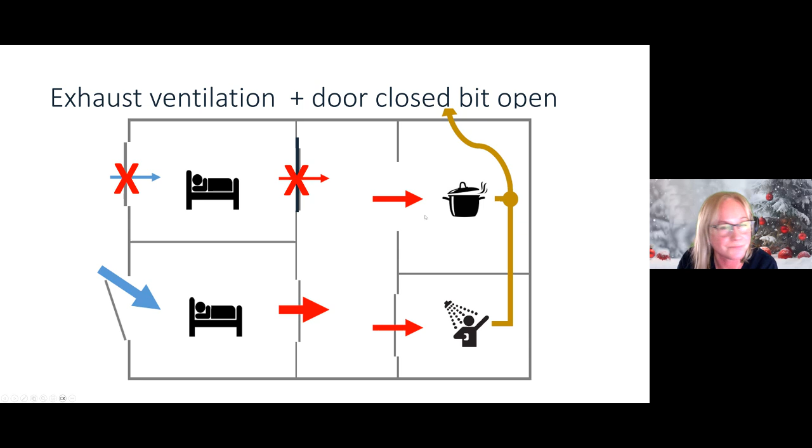Lars also talked about ventilation and moisture. So this is a classic formula for moisture supply, affected by moisture production, volume of the space, and ventilation.

This is the normal ventilation, 0.5. In many of the multi-family houses, it's of course also lower in the old ones. And we can then see a moisture supply of about 2 and 3, which is quite okay.

But when you increase the moisture production, the moisture load will be higher. So for one person, it's about 40 to 80 grams per hour at rest, but you also have to add shower, cooking, wash, laundry, etc.

So the moisture production could be even more than that, could be doubled, and the moisture load will be even more, certainly if the ventilation is bad.

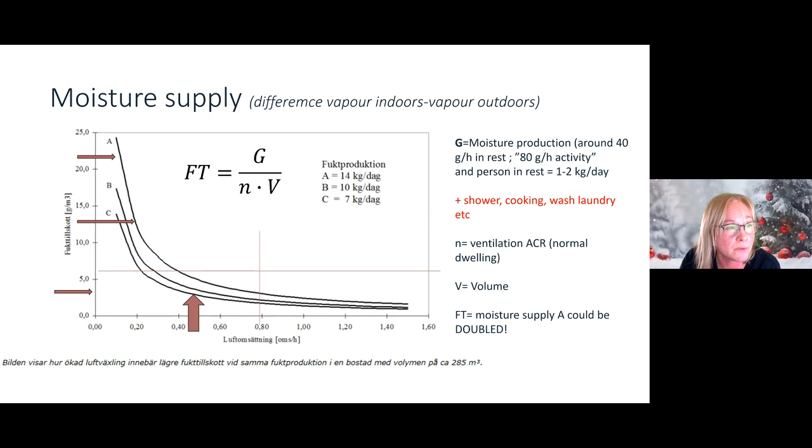Another action for energy saving is also to have more insulation on the attics. There's a classic example where if you lower the ventilation you get a pressure picture that differs from the slight underpressure that you want to have.

So you get some overpressure in the upper part of the building, and it could lead to, if it's not airtight, convection forces making air that includes moisture condense on the cold attic.

And even more so if you insulate extra on the cold attic to save energy, then the temperature gets even lower on the attic, and lower temperature means higher relative humidity.

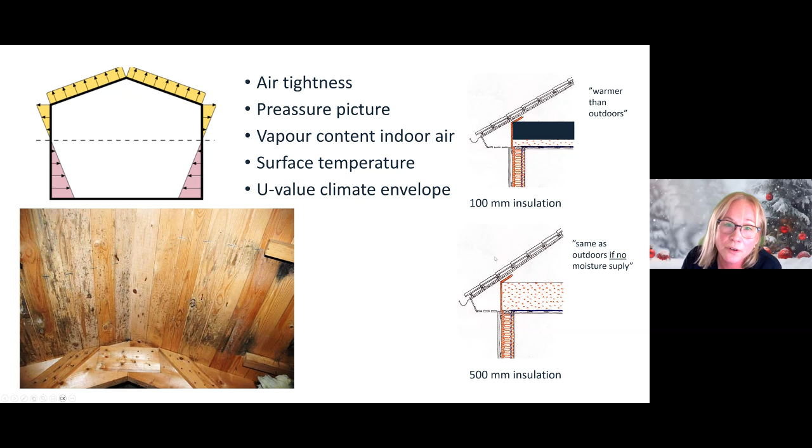It's basic building physics. So a very short summary is: to combat overcrowding we need a multidisciplinary approach. We have to do it smart and also affordably.

People must have the possibility to move to a renovated flat or move back to their own flat when it's been renovated. So that should be a focus - to renovate in a smart way.

And also more knowledge among the residents on how to save energy without affecting indoor air quality and risking moisture and mold. And more knowledge in building physics, both for residents and building owners. So thank you.

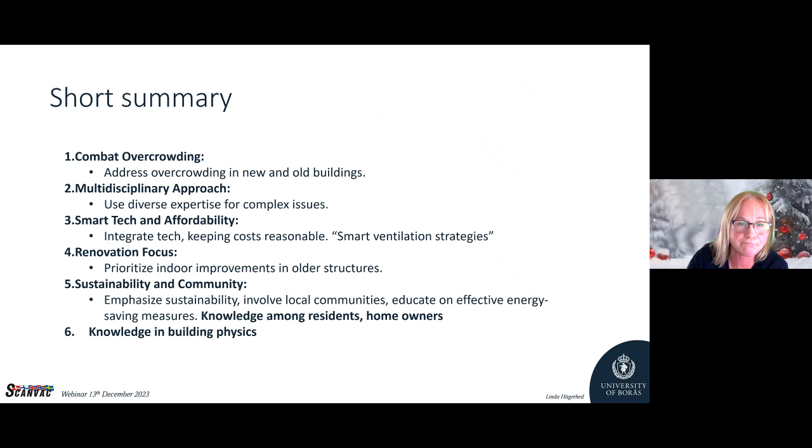Okay, thank you Linda. And now we have heard all four talks, and I think we can move on to the discussion part. I think we got a couple of comments here, and I'll start with Lars.

This first one deals with your slides where you presented indoor temperatures at 19, with over 1,000 hours at more than 70% relative humidity. Is that dealing with some kind of climatic data for Denmark, or how did you get it? That's maybe the first question here.

You're right, it's a test reference year from some years back. We created what was the average of the preceding decade, with normal variation. So the test reference year is from 2010, but it's detailed and, to my knowledge, a full simulation of all kinds of effects.

I think both of you, Lars and Linda, because you have the same topic somehow with a little bit different angle, you showed some kind of calculation there with some kind of theoretical modeling, but do you have measurement data of actual humidity and temperatures in the field? Like your last thought - do you have any data in Denmark?